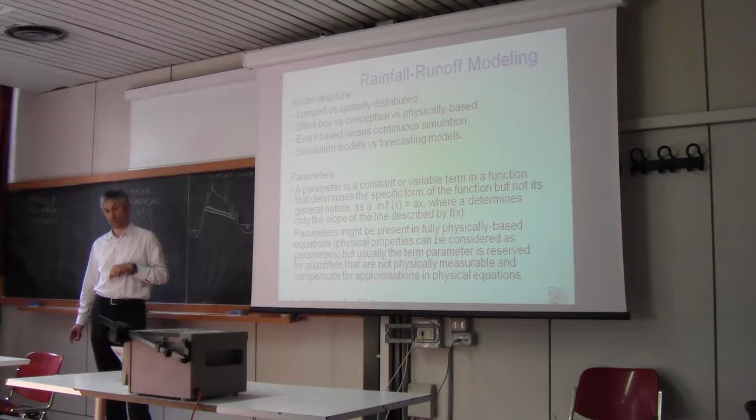For this reason, some hydrologists think that the term physically based is misleading. Some hydrologists say that there is no physically based model in hydrology. There is always some level of approximation due to lumping processes, heterogeneous processes at a finite spatial scale, which comes into play. This approximation arises because in any case, the control volume, even if very small, is never infinitesimal.

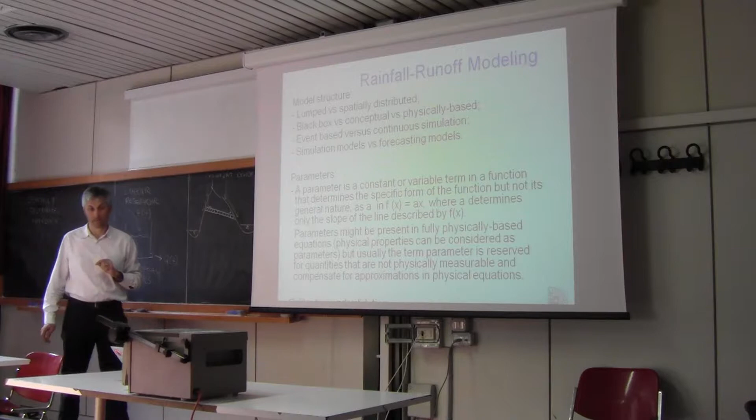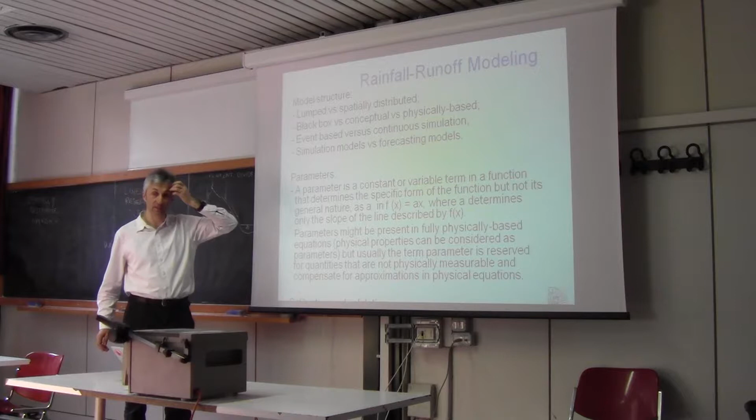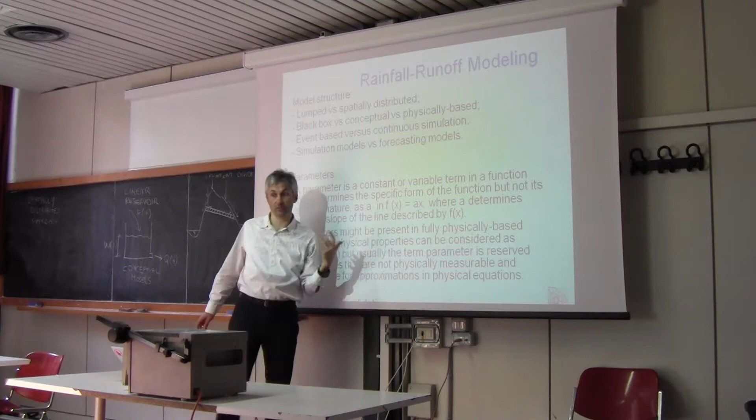But in any case, I think from a didactic point of view, this subdivision—black box, conceptual, physically based—is clear. We have an increasing level of detail and increasing complexity, as we move forward toward our ideal aim to perfectly reproduce hydrological processes.

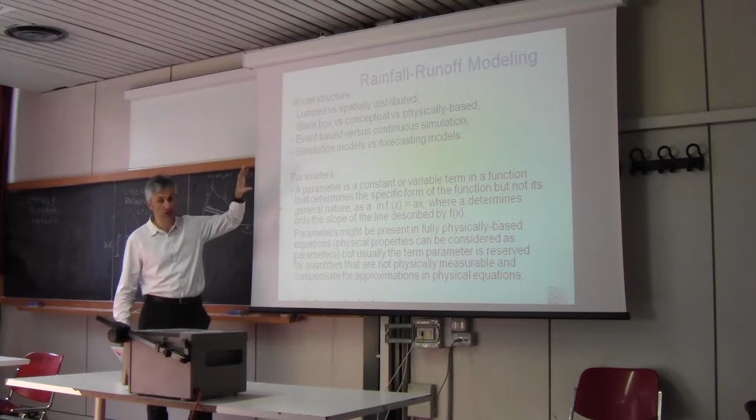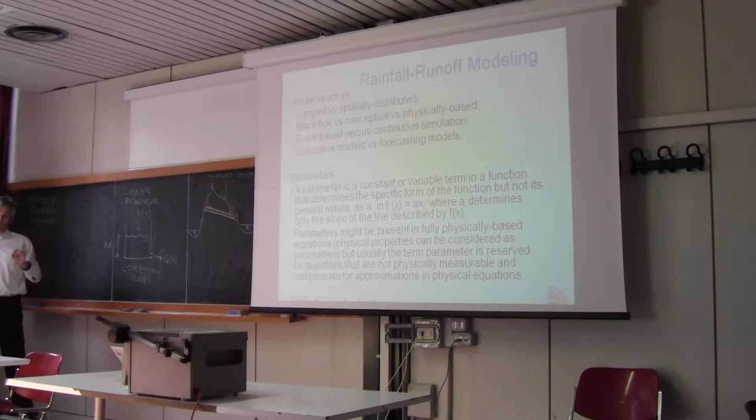Another very important distinction is between event-based versus continuous simulation models. What is the difference? At the beginning, rainfall runoff models were conceived to support the design of flood control structures. About 150 years ago, people became increasingly concerned by floods, because people started to live in close proximity of rivers.

With the evolution of society and the advent of industries, people got closer to the rivers, and they were increasingly concerned by floods. Therefore, the first problem was not really water resources management—that came later, as you know. The first problem was flood control.

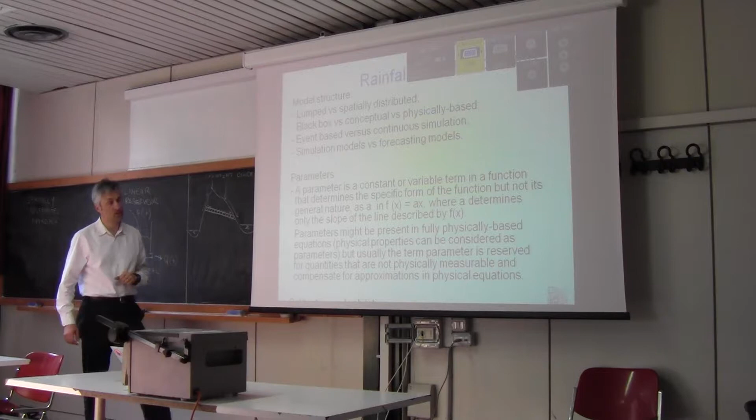People started to elaborate rainfall runoff models to estimate peak flows, not to estimate the whole regime of river flows, just the peak flow. They tried to build models able to reproduce only the peak flows, not the full hydrograph. This is why they restricted attention to small, short events. They didn't care about reproducing river flows along the whole year—only in the rainy season, the flood season. Therefore they tried to build models that reproduced one flood event only. This is the reason for this classification: event-based models.

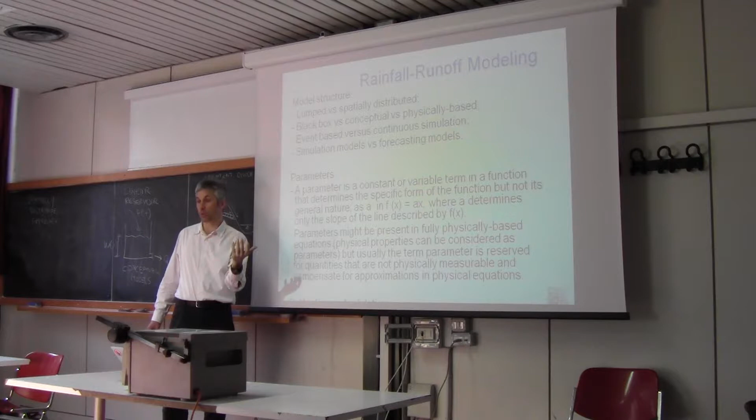And of course there is an advantage: if you reduce the time span covered by the model, you reduce complexity. Also during floods you may neglect some processes like evaporation. Evaporation is not really influential during floods, because you don't experience high temperatures then, and evaporation is reduced. Besides, the effect in terms of volume of water evaporated on a flood is really negligible. So you can forget evaporation during floods.

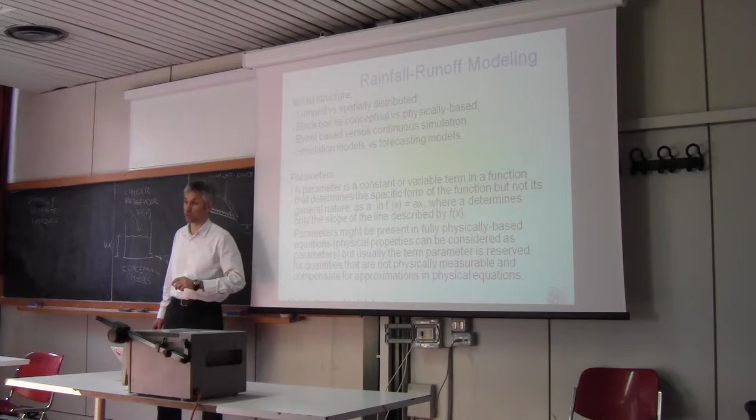But later on, the increasing need to simulate the whole hydrograph for water resources management purposes brought people to devise continuous simulation models, which can run for years to reproduce 100 or 1,000 years of river flows. Of course these models are more complicated and require more computational resources. And then you already know the distinction between simulation models versus forecasting models—I already made that difference clear.

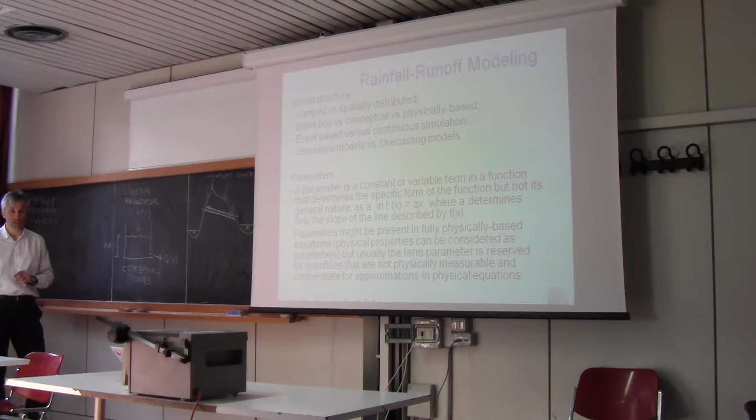Now, what is a parameter? It is an important behavior of a model, and parameters usually appear in the model's equations. I want to give you an example: if you want to describe how water moves along a river, roughness is an important parameter. If you have high roughness, water moves slower than with low roughness. This roughness is extremely important.

And it's a physical property—roughness is a physical property. But because you cannot measure roughness directly, you can only measure it in ideal conditions, such as in a small channel built in a lab. If you go along a real river and look at it, it's impossible to measure roughness. Therefore you have to estimate roughness, meaning you build the model, assume the model is good, and put roughness as an unknown.

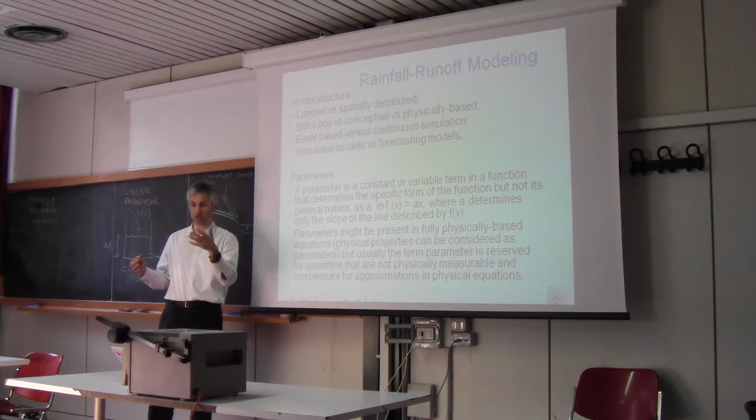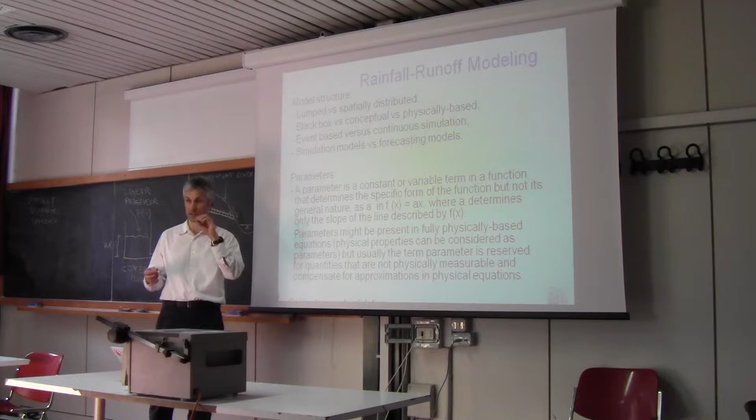Roughness is 'scabrezza' in Italian, just to be clear. You put roughness as an unknown, and then what you do is estimate roughness by optimizing model performances. So you introduce something called a parameter, which is related to a physical property but is indeed something different. Once you build the model, you estimate the value of the parameter by optimizing model performances. This is also called model calibration, optimization, or fitting—these are synonyms. So, what is a parameter?

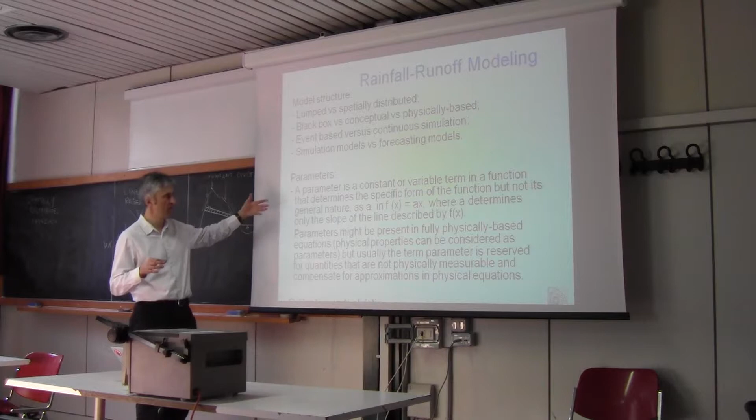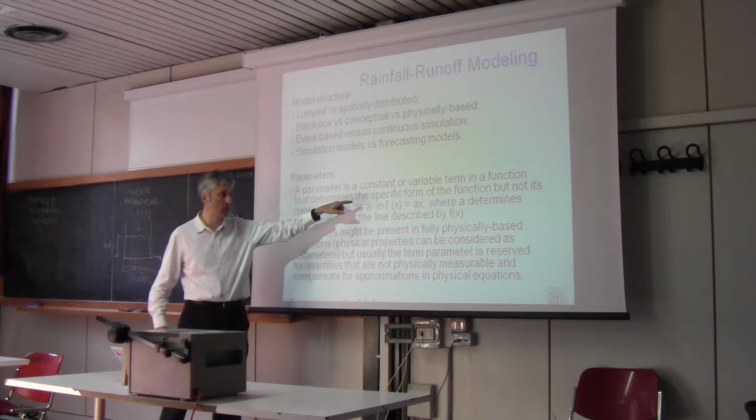It's not easy to define what a parameter is. I made you an example which is relatively easy to understand, but if you want a definition: a parameter can be defined as a constant or a variable term in a function. It can be variable because roughness, for example, is different depending on the season. When vegetation grows, roughness increases, and in the dead season, roughness decreases. So a parameter can be a constant or a variable term, variable in time, in a function - typically a model equation - that determines the specific form of the function, but not its general nature.

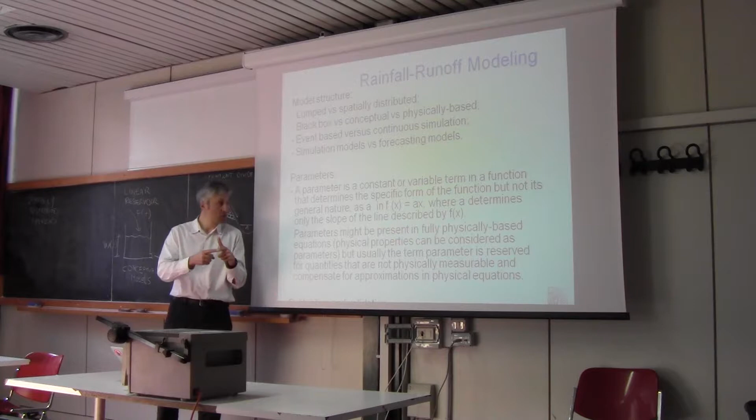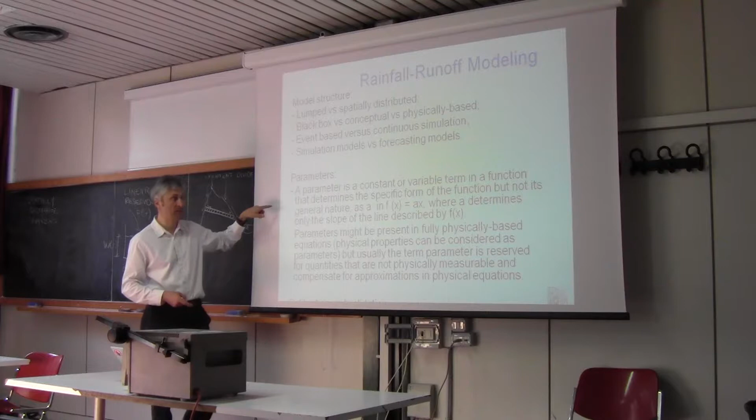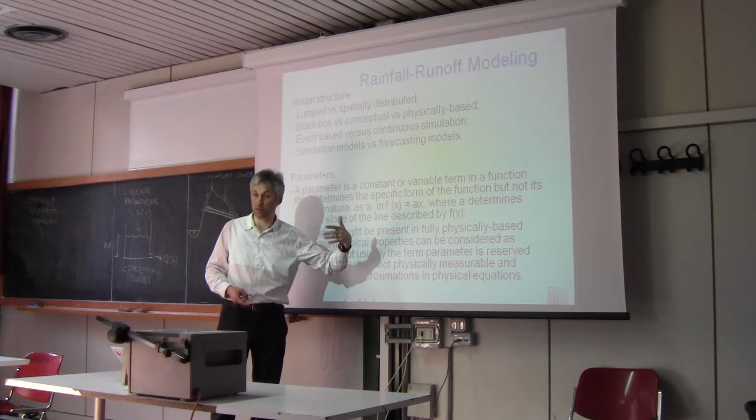What is the meaning of this? If you want to describe river flow depending on roughness, you apply, as you know from hydraulics, two equations: a mass balance equation and an energy balance equation. Roughness comes into play in the energy balance equation. So the general nature, the general form of the equation, is an energy balance, but the specific form of the equation depends on the parameter. The parameter determines the specific form of the equation, because if you have increased roughness, you have higher dissipation of energy. So the specific form of the equation is dictated by roughness, but not the general form, which is just an energy balance, independent of roughness.

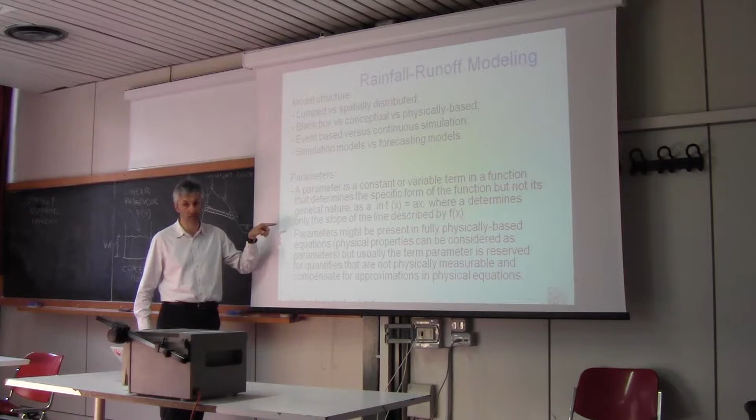Or you may think of a very simple linear relationship: f(x) equals a parameter a that multiplies x, where a determines the slope of the line, but not the fact that this is a straight line. So this is a linear equation describing a straight line - the general form is a straight line, and it's not influenced by a. But the slope of the straight line, which is a specific behavior, is dictated by a.

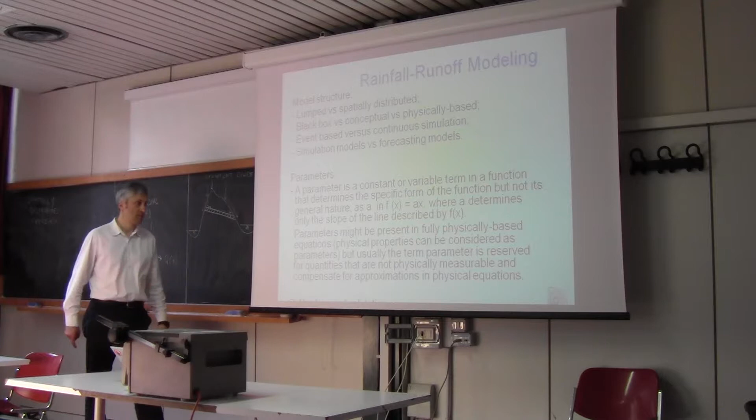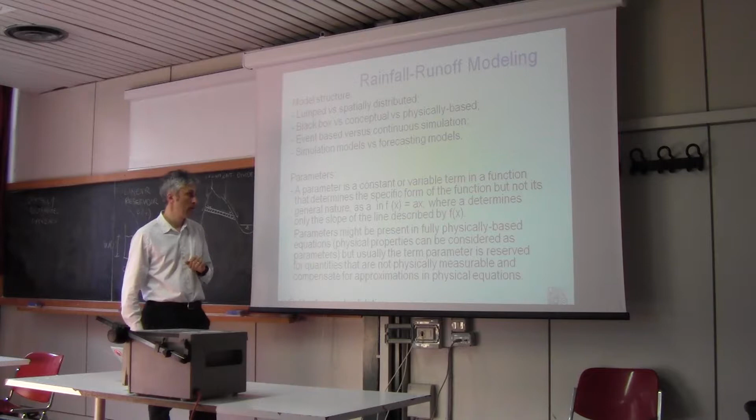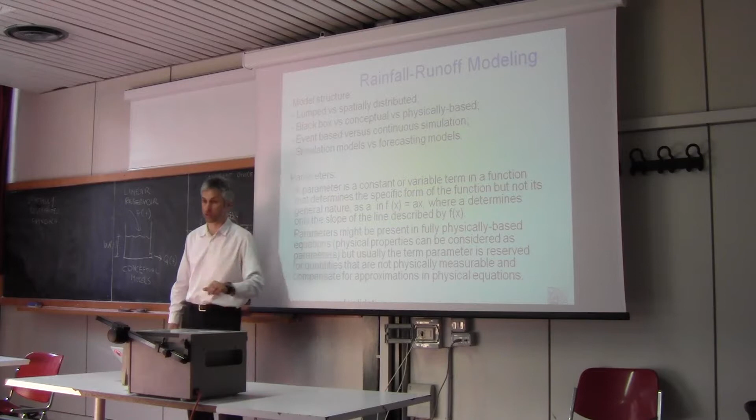Parameters might be present in physically based equations, like roughness, which is included in the energy balance equation. Physical properties can be considered as parameters, like roughness, but usually the term parameter is reserved for quantities that are not physically measurable and compensate for approximations in the physical equations. So it's important to know that these parameters are always present in rainfall-runoff models. There is no non-parametric version of rainfall-runoff models.

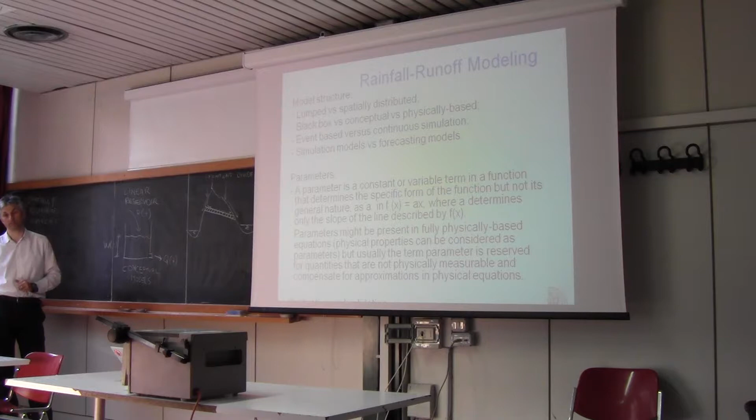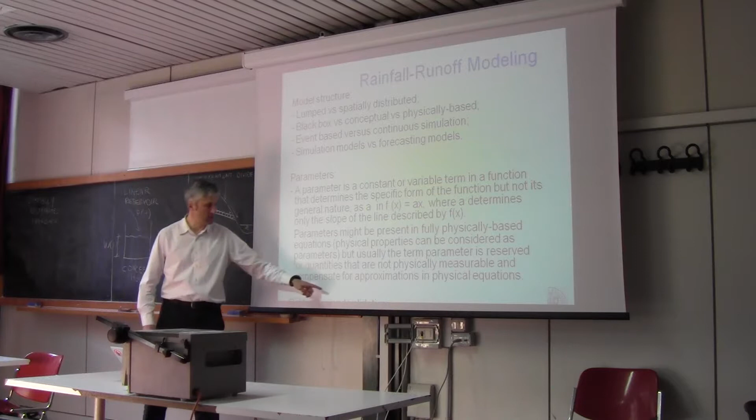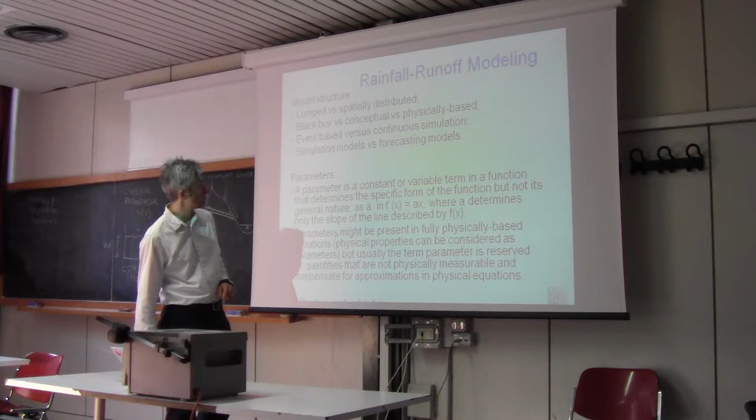Here I'm sorry that the screen is cut, but there is just written calibration and validation. Calibration, I already introduced it to you. Validation, let's postpone it. Okay, some more considerations.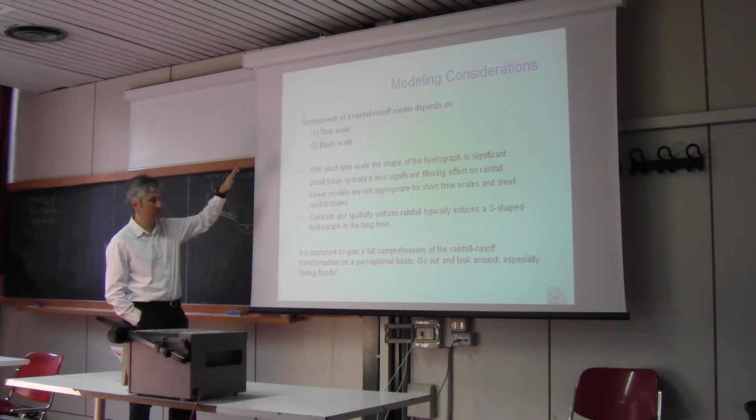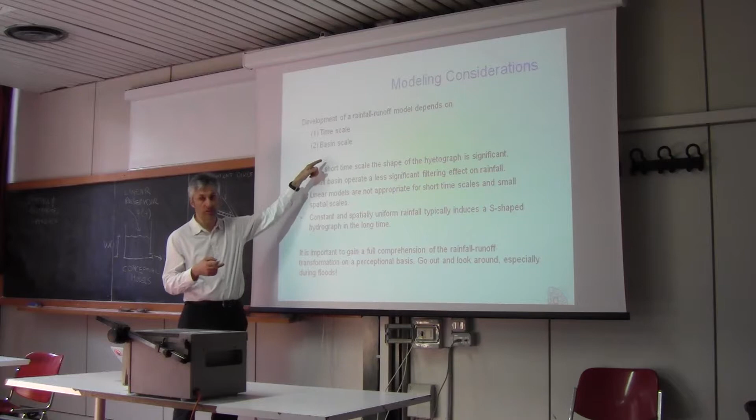Development of a rainfall-runoff model depends on the time scale and the basin scale. What does this mean? Depending on the time scale that you want to describe - river flows at hourly, daily, weekly, monthly, or annual time scale - and depending on the size of the watershed or basin, small versus big, the model changes.

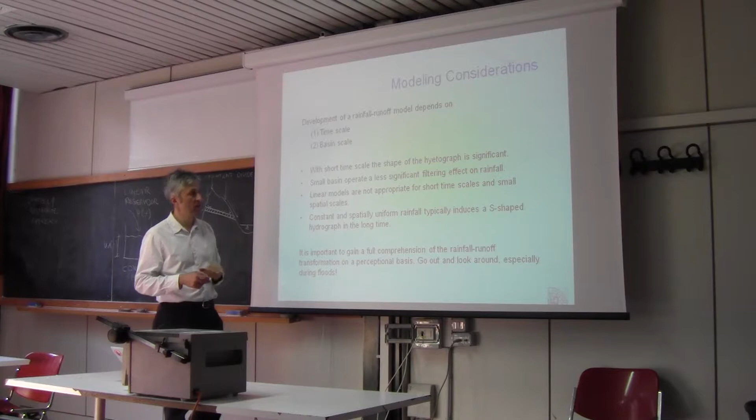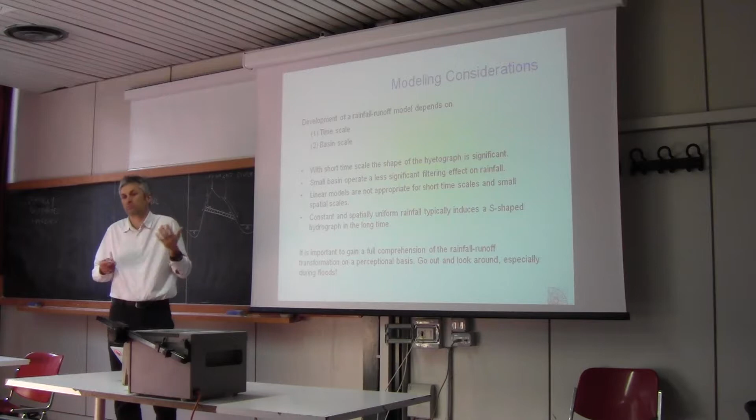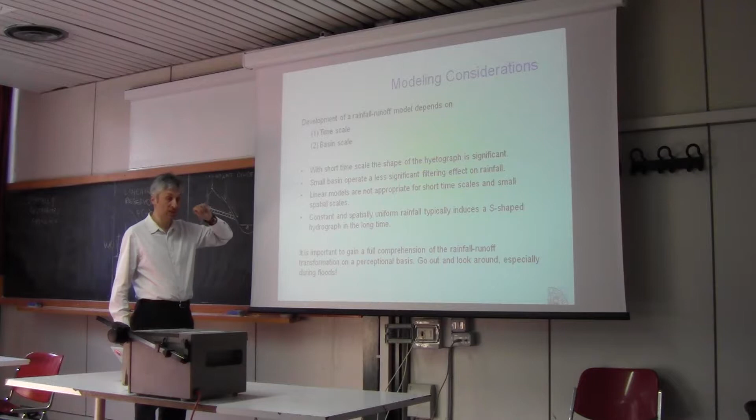With short time scale, the shape of the hyetograph is very significant, which means that if you want to operate at short time scales, the way in which rainfall occurs is very significant. While if you operate at the annual time scale, it's important just to know the annual rainfall, not really whether it rains in February rather than in December. But if you work at shorter time scales, it's important to know the shape of the hyetograph, to know rainfall in detail.

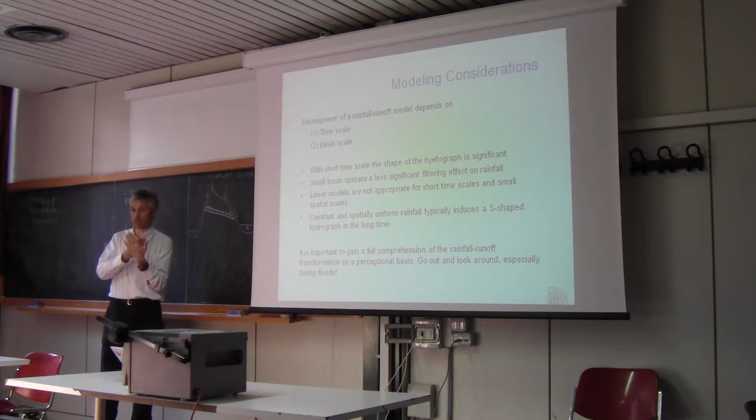And then a small basin - this is another important feature - operates a less significant filtering effect on rainfall. What does this mean? If you have a small basin, the shape of the hydrograph is close to the shape of the hyetograph. If you have a huge basin, then the filter operated by the basin is more significant.

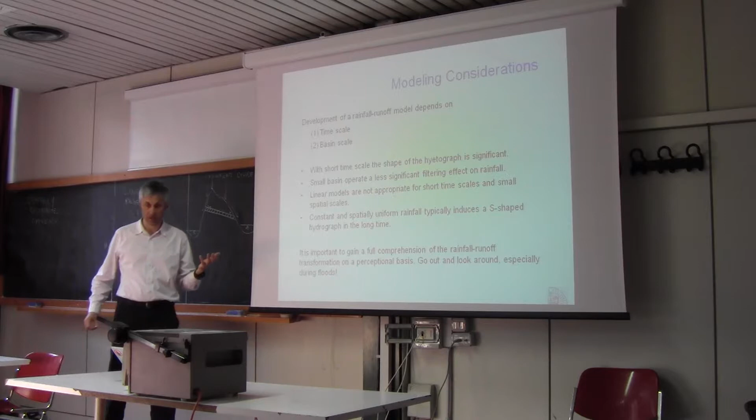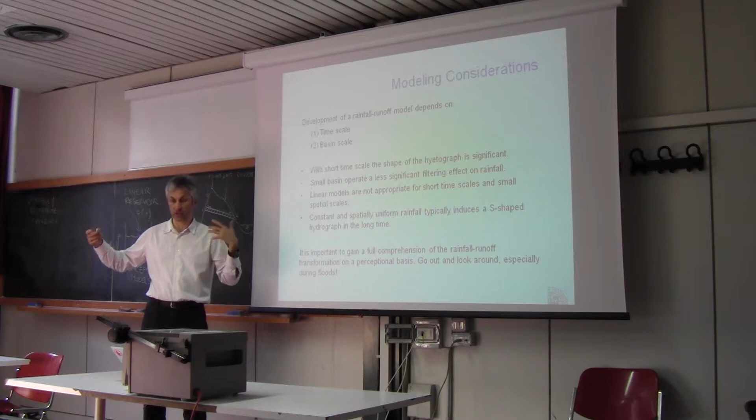These are all considerations related to the relationship that occurs between catchment forms and the river flow regime, and are considerations that are useful to try to better understand this relationship.

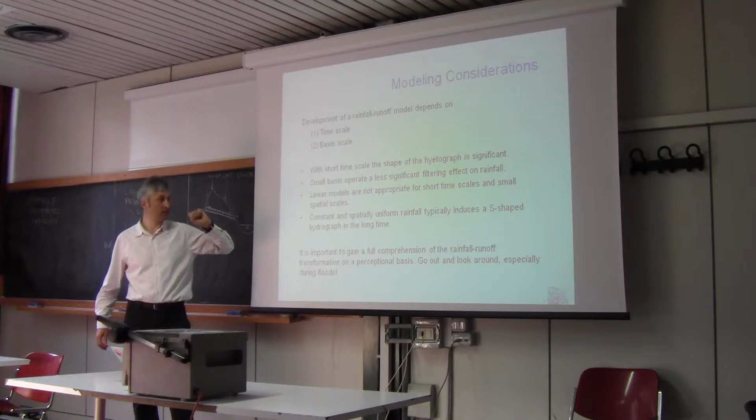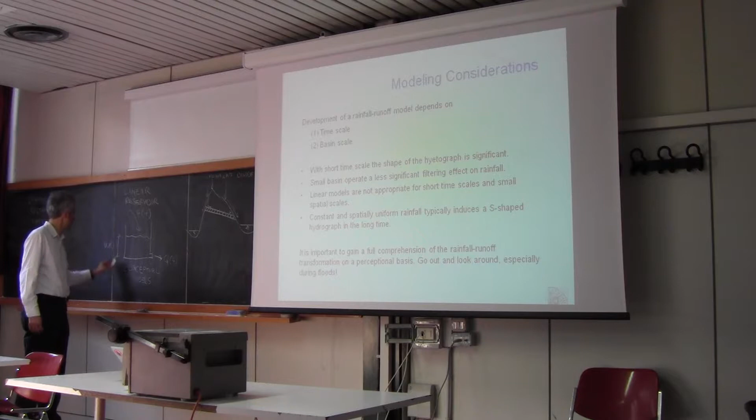Linear models - there are many rainfall-runoff models which are linear. Why do we consider linear models? Because they are simple, very simple to apply. But indeed, the rainfall-runoff relationship is not linear. Because linearity means - first of all, what is a linear model? Let me provide a definition.

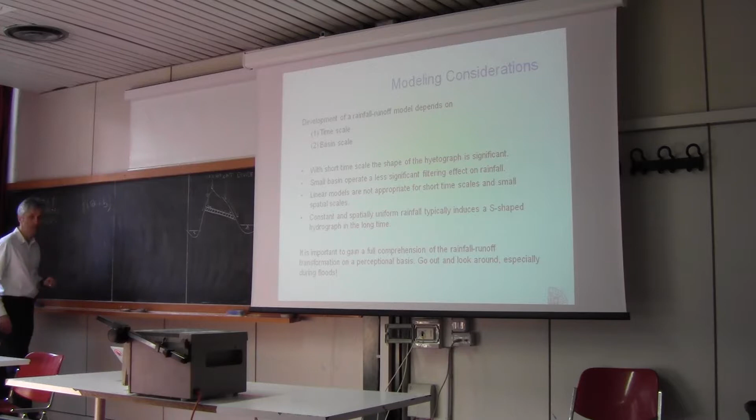If you have a linear model, then f(a plus b) is equal to f(a) plus f(b). This is the superposition effect.

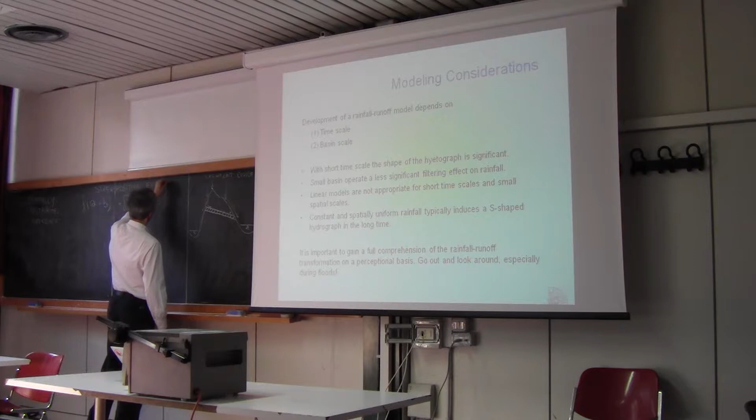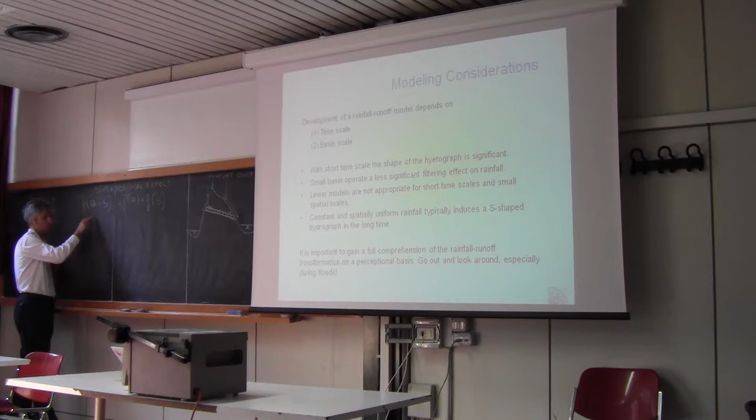It means basically that the effect of a rainfall given by two contributions, the effect of a hyetograph given by two contributions A and B can be given by the only sum of the two single...

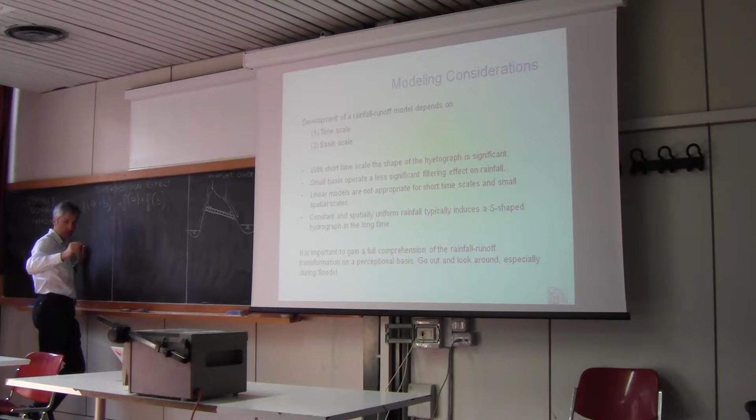This is, of course, not true, because we all know that if you have a huge rainfall that falls over a dry soil, you don't see any flow in the river. You may not see any flow in the river, but once the soil reaches saturation, even a small amount of rainfall can cause a flood.

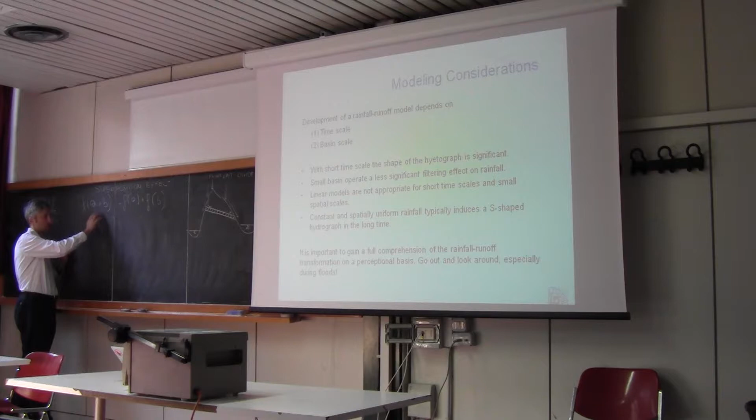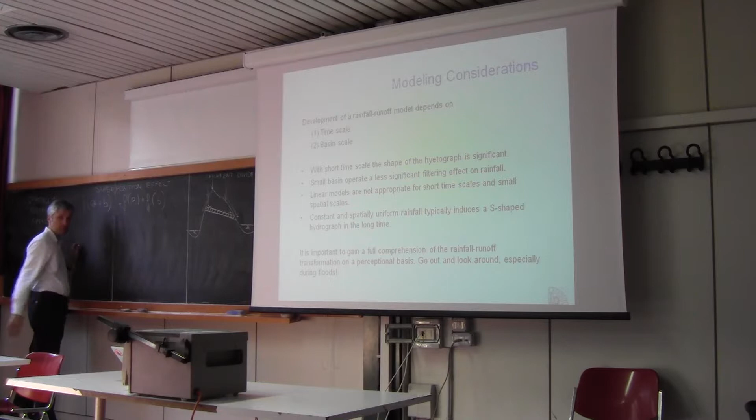This means that it's not true that the effect of the sum of two rainfalls is equal to the sum of the two river flows due to each individual rainfall. This is not true, because there is soil moisture which is playing a relevant role. So the effect in terms of river flow of a rainfall depends on soil moisture, which makes the relationship non-linear.

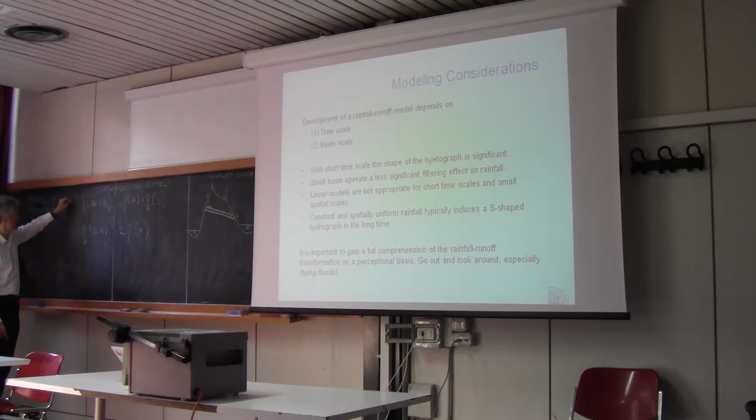And also there is a second condition, which is F of AX is equal to A times F of X. These are necessary and sufficient conditions for a model to be linear.

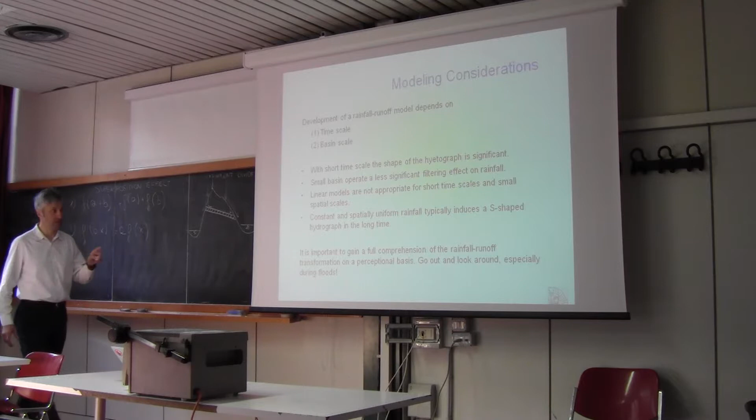So, as I said, for sure, the rainfall runoff relationship is not linear, but linear models are usually applied because they are simple. The linear approximation may be appropriate for long time scale, is not appropriate for short time scale and small spatial scales.

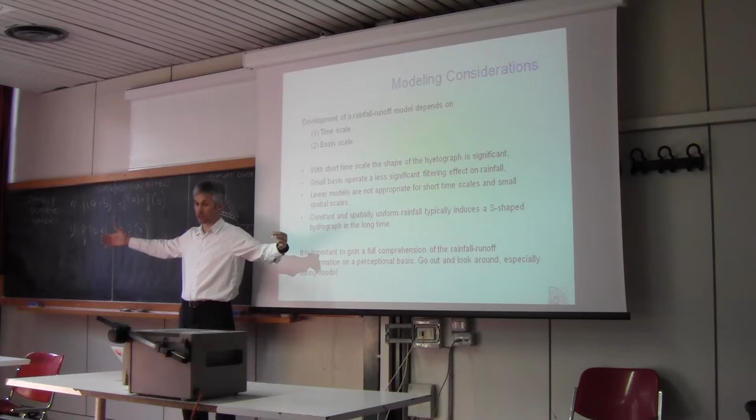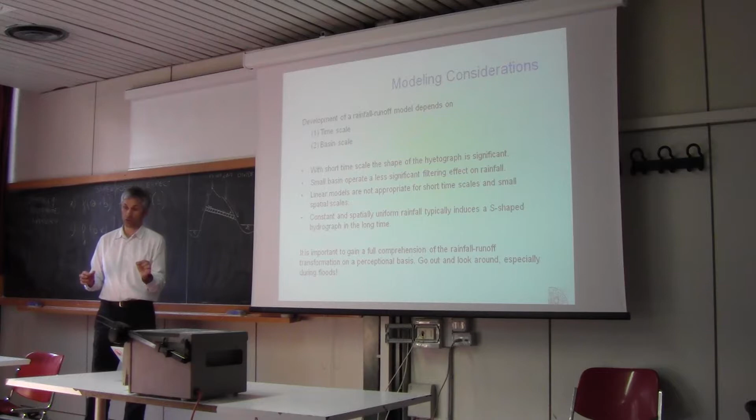As you refer to increasing spatio-temporal scales, then linearity becomes a reasonable approximation. But if you go down to short time scale and small spatial scales, linearity is no more a reasonable approximation.

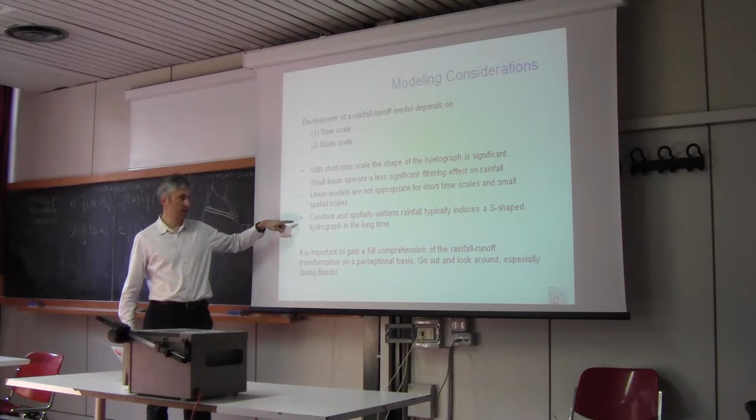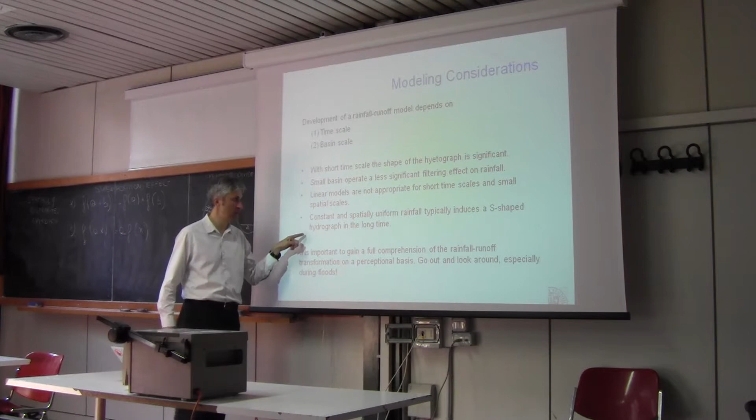Constant in time and spatially uniform rainfall is an approximation. You see that it typically induces an S-shaped hydrograph in the long time. This is a well-known behavior of watersheds.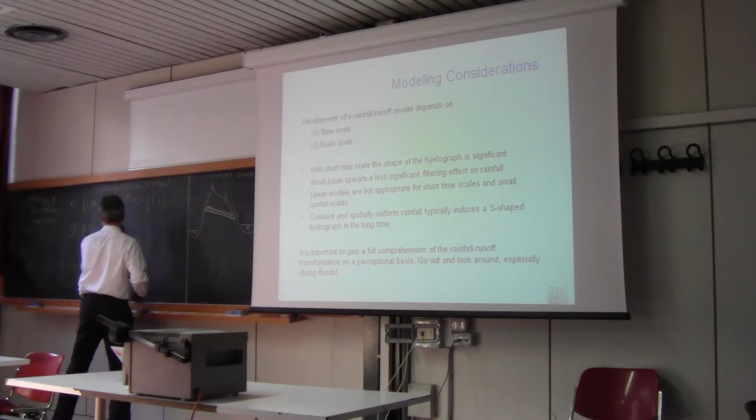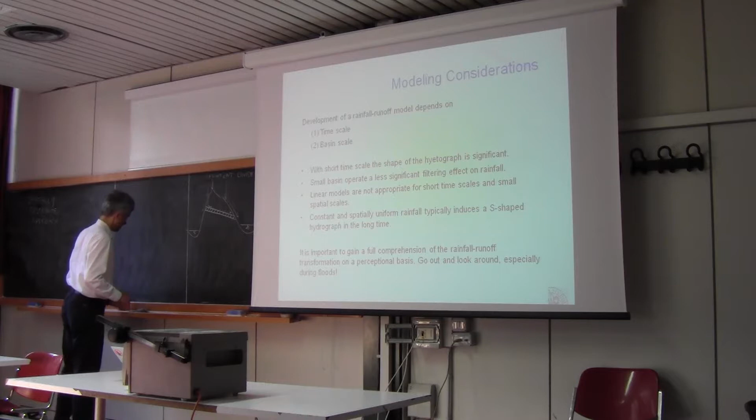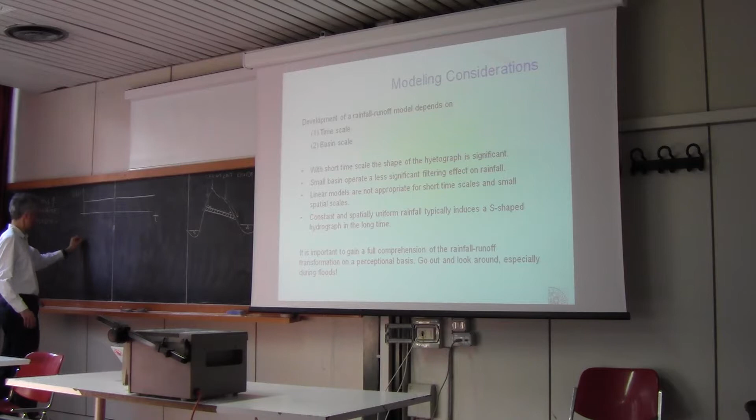Which means take a watershed and apply a rainfall. Let's call it R(t), which is constant and very long. What is the effect in terms of river flow? It is what is called an S-shaped hydrograph, which means that, let's specify a limiting flow, the hydrograph has this shape.

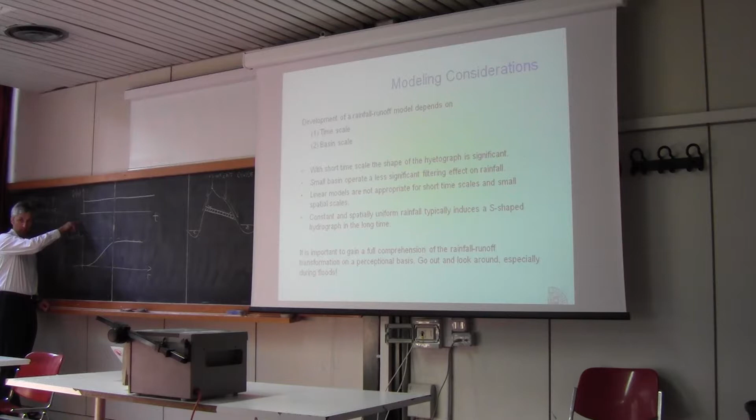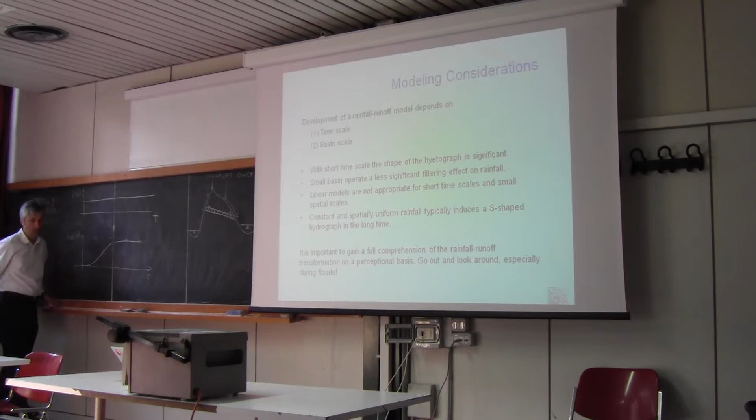Why this? Because you have a slow increase of river flow at the beginning of the rainfall, because much of the rainfall infiltrates, and then you get close to saturation. You have a rapid increase of the river flow up to a maximum. The maximum is reached after saturation and represents the maximum flow from the watershed in reply to the given rainfall.

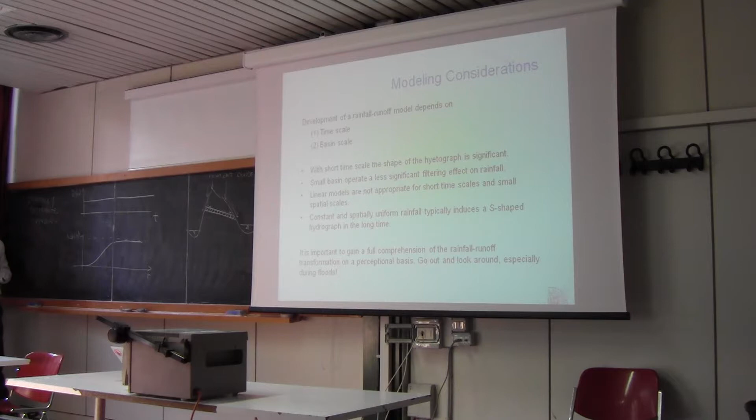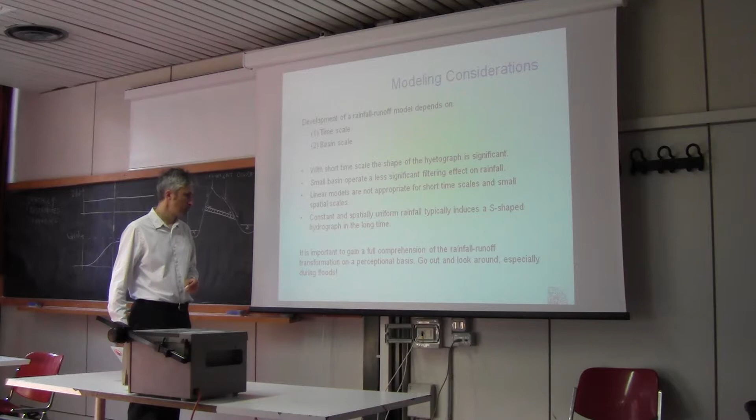This is important to understand basic watershed behaviors. Again, it's important to gain a full comprehension of the rainfall runoff transformation on a perceptional basis, because this helps you to build the model.

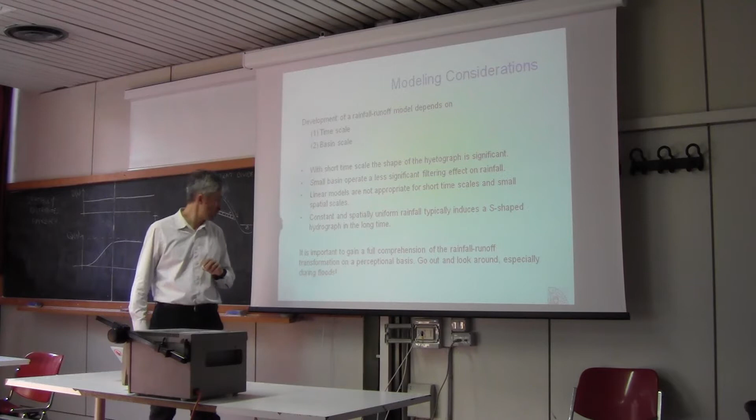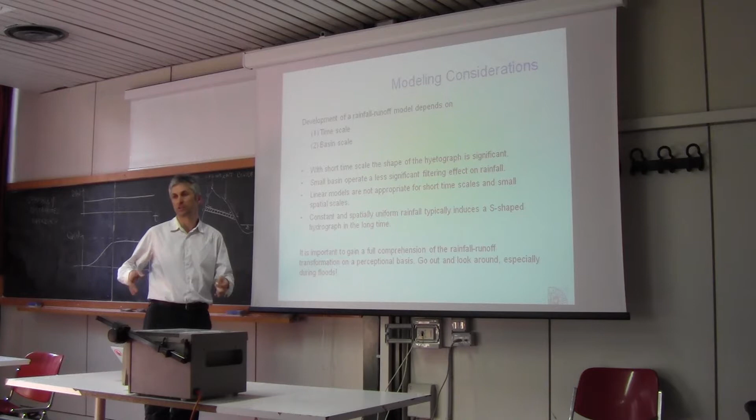My suggestion is go out and look around, especially during floods. If you get the news that a flood is occurring, it's interesting to go there and see, because by looking at the river during a flood, you really understand what's going on.

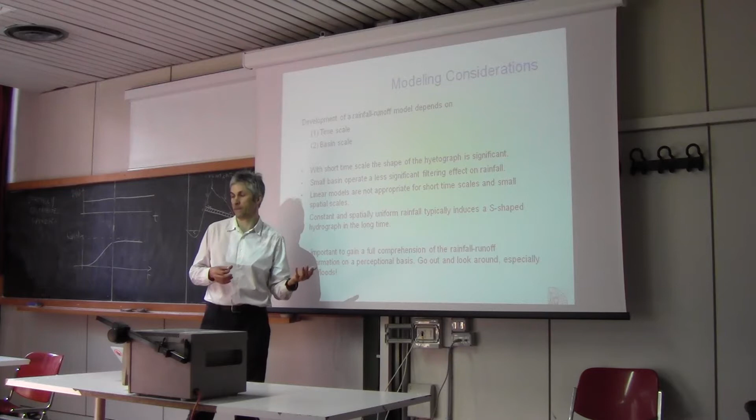But in general, it's very much appropriate if you want to gain good experience in hydrology, just to look around when you see rivers, when you see water flowing, to try to better understand how water flows, how a catchment reacts to water, sometimes maybe to rain, maybe you are hiking during a rainfall, and looking at how the rainfall flows toward the river helps you very much in understanding a perception of how water flows, how the river flow is forming.

So let me give you a first example, which is very, very relevant, although very, very simple. It is the rational formula. The rational formula was the first attempt to build a rainfall runoff model.

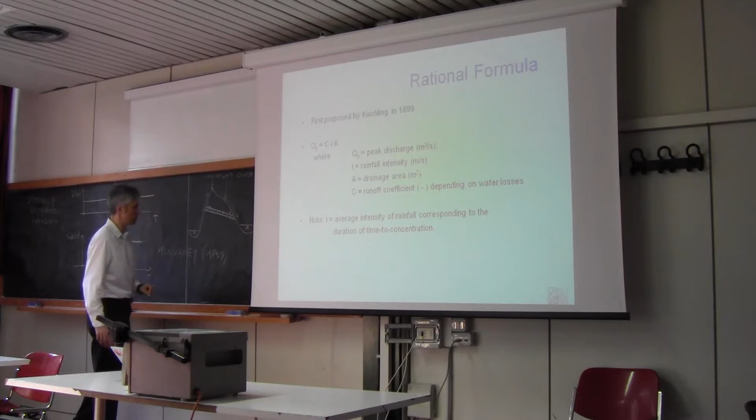People are debating who proposed it. I put here the reference, Kuchling, 1889, but Irish hydrologists claim that it was first proposed by an Irish engineer called Mulvaney. I don't know how to pronounce it. Accordingly to them, Mulvaney proposed the rational formula in 1851.

So US people tend to state that the proposer was Kuchling, but Irish people say that it was their invention about 20 years before.

The rational formula, which is widely used in engineering, can be considered a rainfall runoff model, although it's so simplified that in principle you don't need to refer to physical laws to elaborate it. So it can be considered a black box model, but indeed, as we will see, there is some physical basis, because it's basically a mass balance equation.

The reason why I wanted to postpone the treatment of the Reynolds transport theorem, which is a physically based equation, is that I wanted to show you before that it's in principle possible, and in fact, historically people did so. It's in principle possible to derive, to write a rainfall-runoff model without resorting to any physical equation. So what is the essence of the rational formula?

The rational formula recognizes that, first of all, it aims to reproduce not the full shape of the hydrograph, but just the peak. You don't see any dependence on time here, just a subscript p, which means peak.

And there is another reason for a runoff coefficient higher than 1, which is an erroneous estimation of the catchment area. Because you may run into problems like the one I mentioned before, where the catchment divide is not a good indicator of the real divide between the waters, and therefore the catchment area is erroneously estimated.

Be careful, the rational formula is linear, you see. If you put here a sum of two intensities, the resulting river flow is given by the sum of the river flows due to each single rain intensity. So it's linear.

And then you may understand that at a small spatial and time scale, it may not really be appropriate. What is the problem here? The problem is not the estimation of the catchment surface, which of course may be difficult, but in general we can solve it quite easily. The problem is not the estimation of the rainfall intensity. The big problem is the estimation of C.

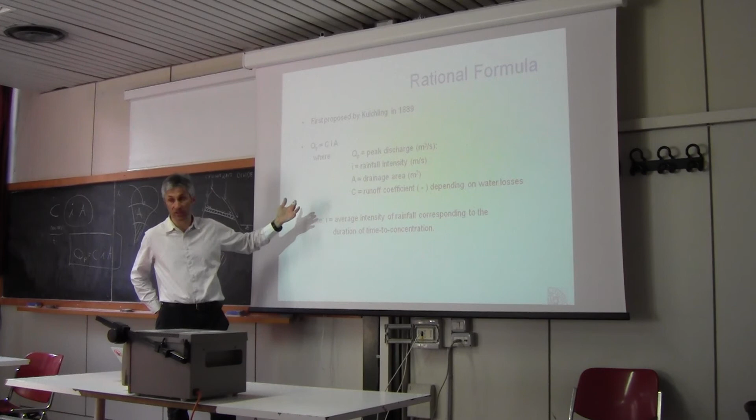Because if you make an error in C of 20%, it translates into an equal error in the river flow - an error of 20% in C implies an error of 20% in the river flow. We know that C is typically lower than 1, but it's not easy to estimate it. And if you take a precautionary, conservative approach of putting C equal to 1, you obtain a river flow that is overestimated, like 100%, 200%. If C is 0.5, and you assume, by adopting a conservative approach, that it's 1, you overestimate the peak flow by 100%, which is an enormous amount.

So with the rational formula, this is the big problem. And... sorry, before I move forward.

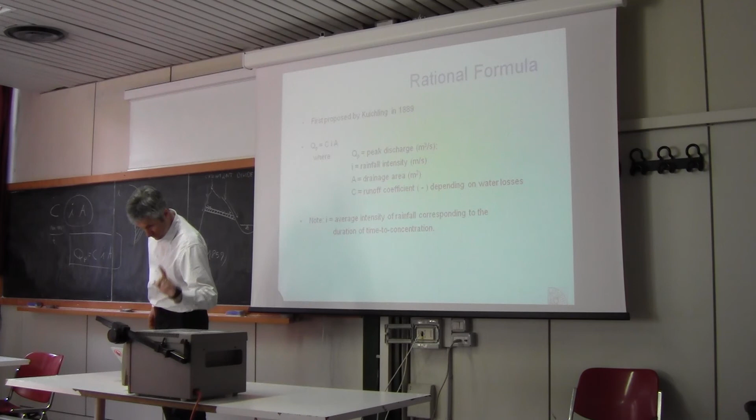There is another problem here. What kind of rainfall intensity should I put in? Rainfall intensity varies depending on how extreme the rainfall is. Of course, I may say the maximum rainfall that I ever observed over a catchment. But given that I have a very limited amount of observations, the maximum rainfall that I observed could not really be representative of a peak rainfall.

Let's assume that you have 20 years of rainfall observations. If you take the maximum, it's representative just for 20 years, but next year you may experience a higher rainfall. So rainfall depends on how extreme rainfall itself is.